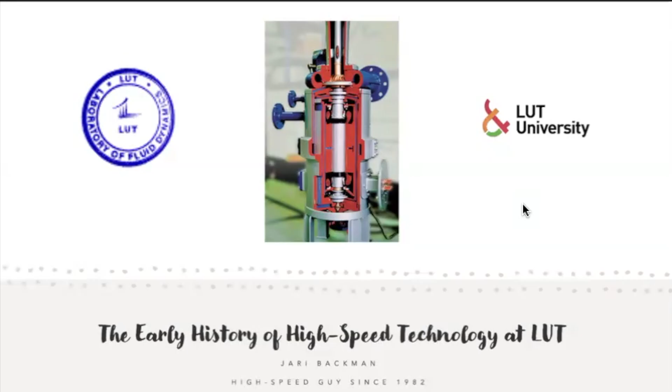Our story begins in the late 1970s, sparked by an international energy conference and a visionary idea to convert waste heat into electricity. The genesis of this research lies in the 1976 Total Energy Conference in Copenhagen.

Professor Wilson and his research group presented an idea for a small-scale power plant based on the organic Rankine cycle, ORC, producing both electricity and heat. This concept resonated with the young Jaakko Larjola, who attended the conference.

In 1980, while acting as substitute professor of LUT, Larjola, together with Professor Sarkomaa, received funding for a project. The goal was ambitious: to build a 30-kilowatt prototype turbogenerator of an ORC power plant. The project officially began in 1981, and here we see the early sketch from the prototype.

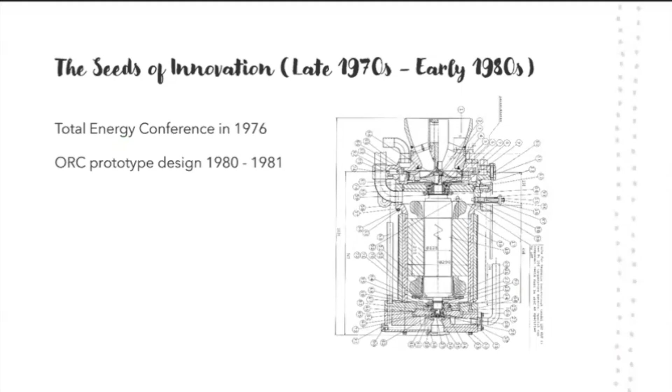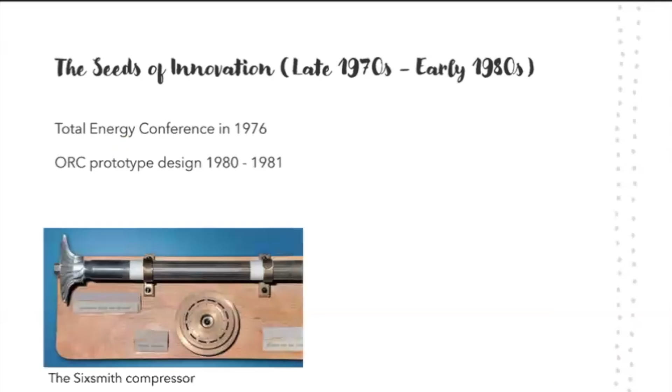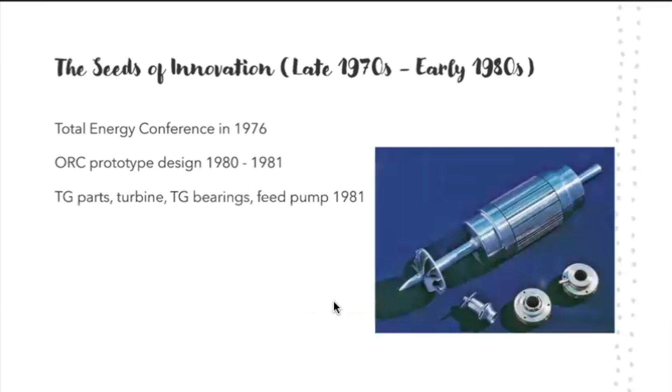Larjola traveled to Oxford, where Professor Herbert Sixsmith guided him into the secrets of gas-bearing technology. Around this time, the recently retired Professor Esa Vakkilainen started his master's thesis work on the project. And here we have the electric generator, turbine, the feed pump, and radial bearings.

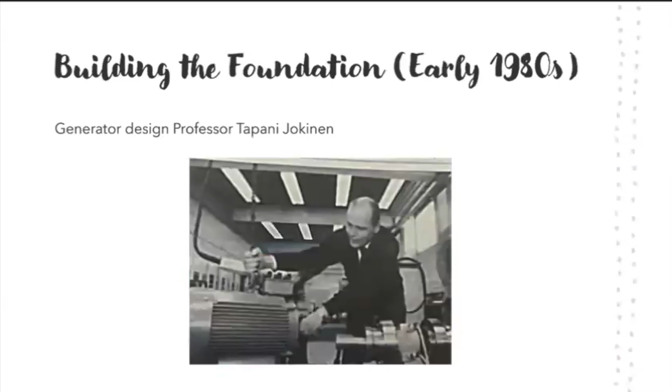Professor Tapani Jokinen from Aalto University designed the high-speed electric machine, which was in this case the generator. Technicians Jouni Ryhänen and Ilpo Taipale were in charge of manufacturing the gas bearings. Their skills in producing these bearings earned them the Master Craftsman Award from the Academy of Technical Sciences in 1982.

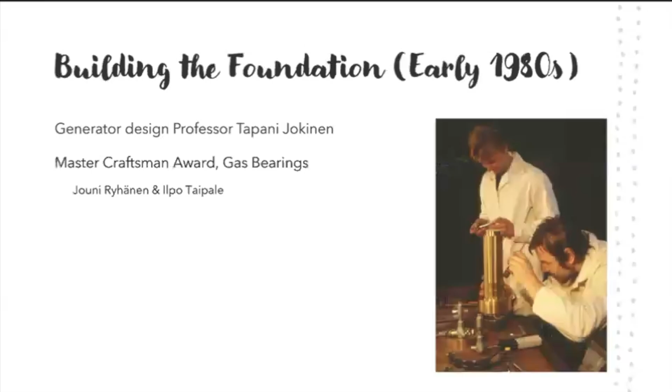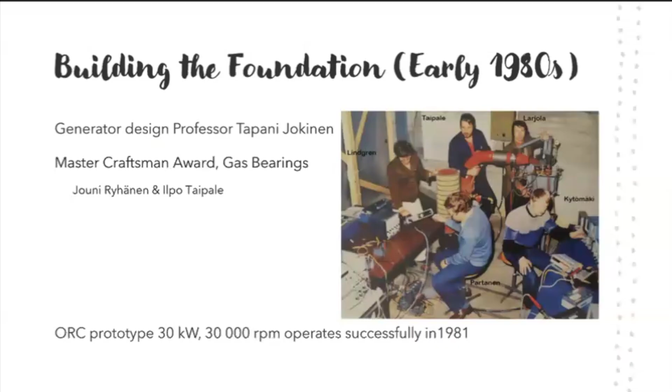The 30-kilowatt high-speed turbogenerator feed pump itself was completed in 1981 and performed roughly as expected, rotating at 30,000 RPM. This early success paved the way for big news. A press conference was held to present the benefits of the project, called Pienoisvoimala, micropower plant. The small team managed to get funding for the 100-kilowatt prototype power plant.

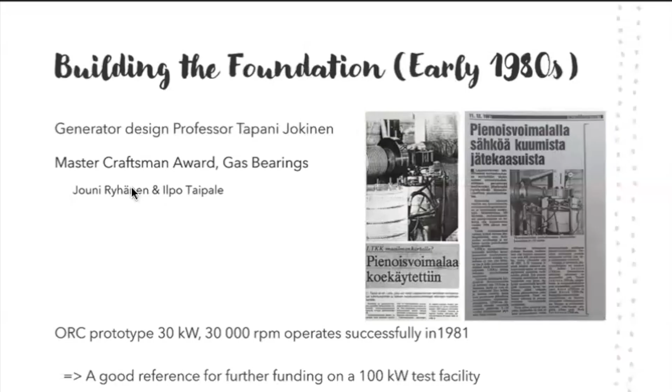Around this time, people started to talk about high-speed technology. While the ORC power plant was the primary focus, LUT researchers saw potential also in other areas. In 1983, I started with Reijo Päivinen the research on a high-speed compressor. This led to a research project with MecAmer aimed at developing a low-pressure air compressor, still with a high speed.

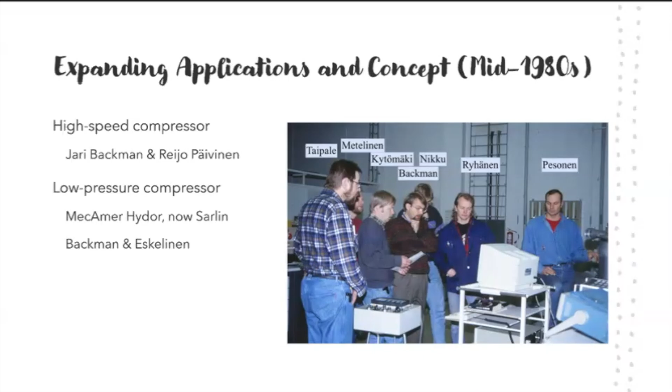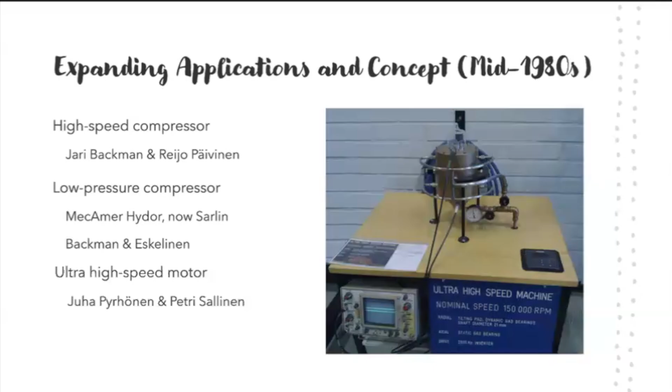At the same time, Juha Pyrhönen conducted the study on a small gas-bearing high-speed motor. This motor reached a remarkable speed of 150,000 RPM and is still operating today. It was meant to be a laser scanner. Petri Sallinen joined our team and would become our tribology guru.

Building a 100-kilowatt ORC prototype at LUT proved to be quite a challenge. The team, led by the optimistic Larjola, learned that constructing a power plant is far from simple. After hard work, the unit successfully produced electricity to the grid in 1985.

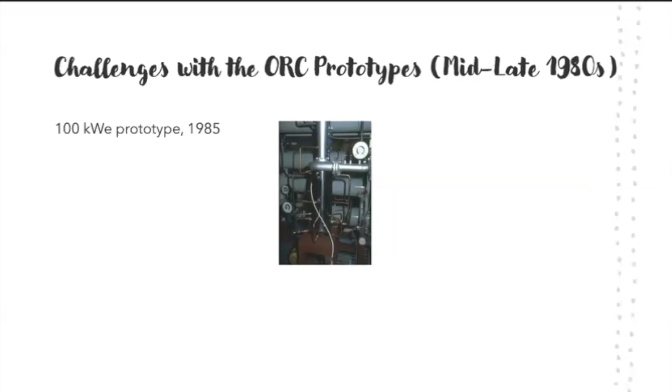It was fueled by liquefied petroleum gas and burned in a self-designed matrix burner. The unit was fully manual and needed 3 operators to be functional. So as you see, we have decreased the number of operators from 5 to 3 now. But more was to come.

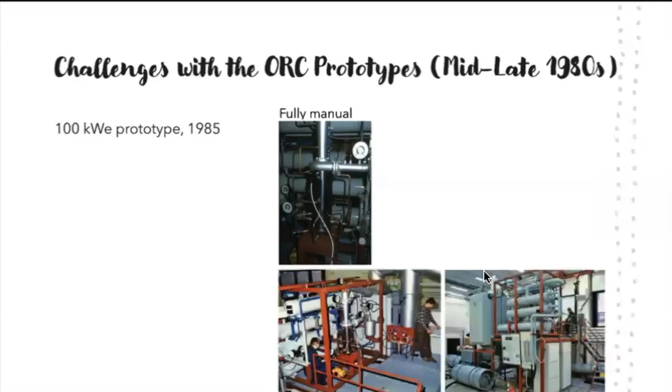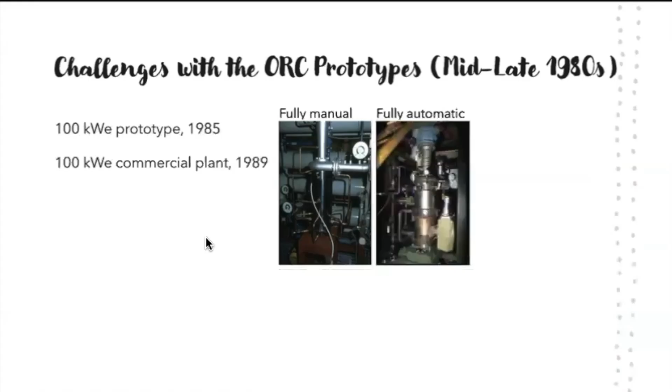This Kuopio-based ORC unit, equipped with a frequency converter, fed electricity to the grid in 1989, and this power plant was fully automatic. But it faced problems, including dirt and water entering the process from sawmill piping, first damaging bearings and finally short-circuiting the stator of the generator.

The working fluid, R114, also presented limitations due to its ozone-depleting potential, making it unsustainable in the long run. The frequency converter technology at the time was hard on gas bearings. Therefore, a decision was made to use liquid bearings. This maintained oil-free operation while providing increased load capacity for the bearings.

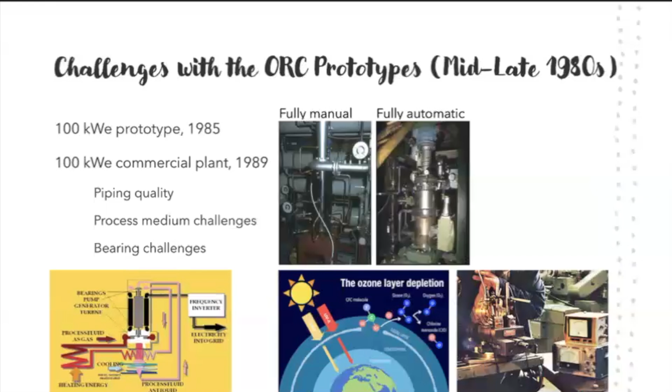A crucial step towards making business was securing an industry partner. Already in 1981, Larjola had filed patent applications for the high-speed turbogenerator. 3 patents were eventually granted, and the main patent was also validated abroad.

A major turning point was the contact from the oceanics unit of Rauma Repola, which needed small power plants for deep-sea applications, like the Mir submersibles capable of operating at 6 kilometers depth. And we all know that they later appeared in the Titanic movie. Jarmo Alamäki was the project engineer from our side.

In 1990, Rauma Repola bought the High Speed Tech company. Kauko Helevirta became the first CEO, and several key LUT staff members transferred to work at HST. Timo Kytömäki identified aeration compressor as a potential application, which became the company's main product. HST used Vacon IGBT converters for its aeration compressors.

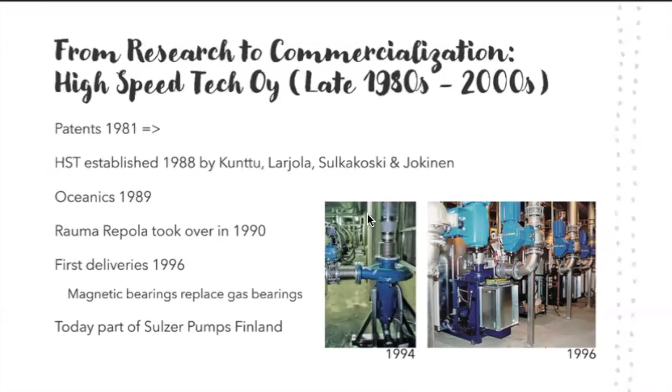The company operated in 3 cities, Tampere, Espoo, and Lappeenranta. Also, researchers at Lappeenranta and Helsinki universities worked with HST, some full-time and some part-time. Once a month, we had meetings together, first on a rotation basis, and then decided that people will travel to LUT campus in Lahti.

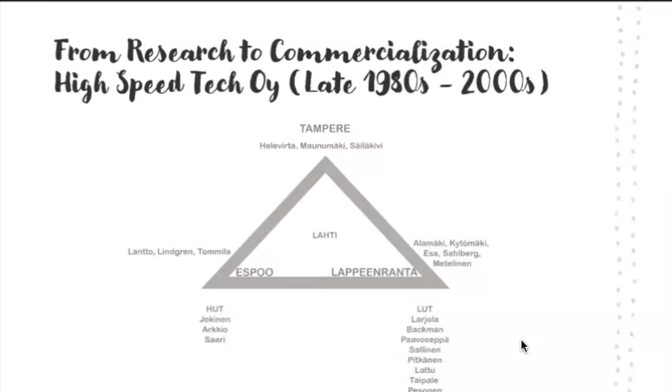Research in the 90s also explored numerous other applications, notably the reversed Brayton cycle, high-pressure pumps, and high-speed refrigeration machines.

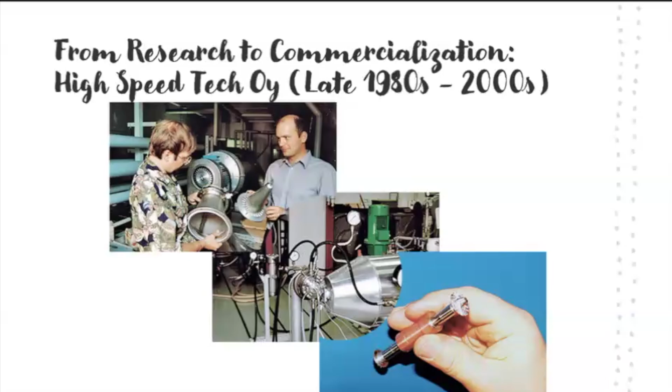And there would be other companies. Jarmo Alamäki left HST and founded Rotatek Finland in 1996. Rotatek focused on medium-speed electrical machines utilizing Pyrhönen's electric motor design. Ecopump, nowadays Runtech, provides vacuum compressors for the paper industry, and was Rotatek's main customer.

Rotatek's motors operated at lower speeds, around 10,000 RPM, and covered a power range up to 1 megawatt, and used oil lubricating bearings. Rotatek was later acquired by Vacon and is now part of the Switch drive systems, and they focus on wind turbine generators.

The ORC concept also eventually achieved a real business case. The Dutch company Triogen acquired the necessary rights from HST. A 175 kilowatt unit built into a standard container was completed at LUT in 2003 as a start of their success story. This unit was tested in lower than 30 degrees cold.

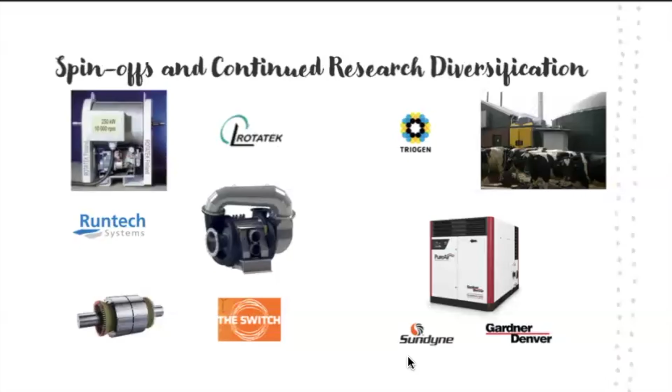Beyond the commercial successes and technological advancements, this extensive project has also yielded significant academic results. In addition to numerous publications, it has led to the completion of many doctoral dissertations. This strong academic foundation, coupled with dedicated research and development efforts, was instrumental in defining and advancing the field of high-speed technology. It's a testament to the power of university research and collaboration in driving technological innovation and creating new industries. This history demonstrates LUT's pioneering role in establishing an important engineering field in Finland and internationally.